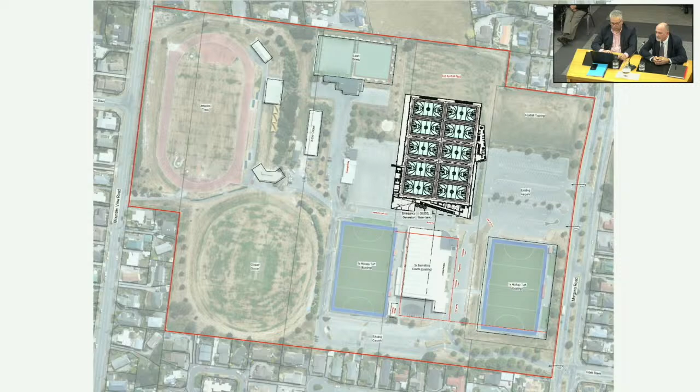This was the proposal put forward as a result of the initial tender, with two options for an 8-court and a 10-court stadium. This shows the 10-court as a separate building with integral changing facilities, reception, and gymnasium as support facilities, with the intention to demolish the existing stadium.

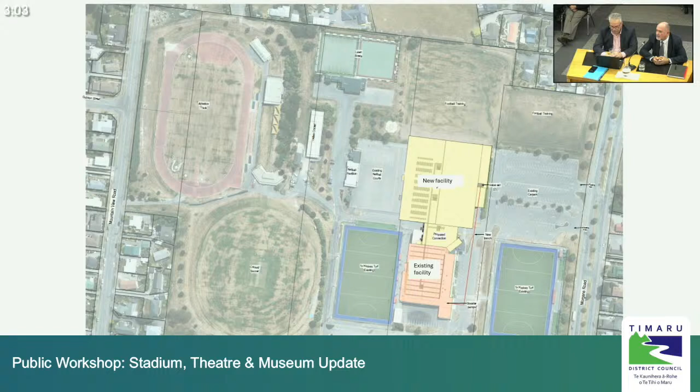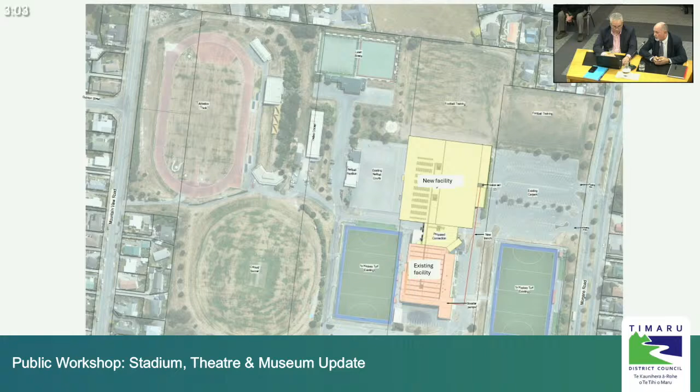Following the council resolution, we looked at the optimum way to retain the existing stadium, and we'll look at each building in more detail as we go through. You can see we've moved the new stadium south and linked it to the existing one with a building we originally called the Link Building. The yellow building is the new facility, an 8-court facility, and towards the bottom of the screen, the orange or buff is the existing facility, the existing 3-court facility.

The original tender that was put forward made some assumptions in terms of the ground conditions beneath the new stadium, to de-risk it and ensure that we were going into it eyes wide open. We undertook a fair bit more geotechnical investigation, and that did show that the ground conditions weren't quite as good as we anticipated or hoped. So that led to a bit of a redesign, a bit of a rethink in how we construct the foundations for the new stadium. It will involve a fair bit of earthworks, digging out, replacing with gravel raft foundations, beefing up the foundations to the new stadium, and some piling work around it. As you imagine, that all costs a bit of money, so we had that to contend with as well.

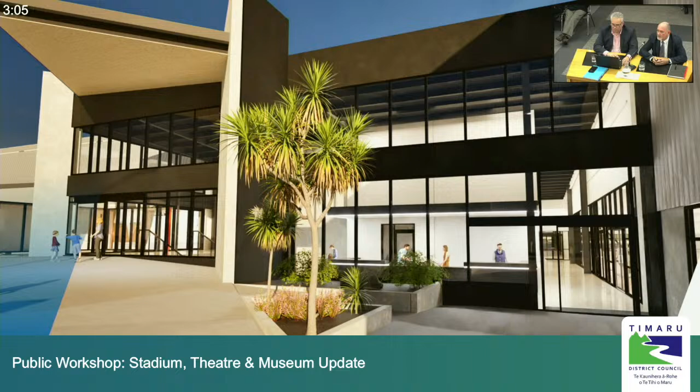The link building here, you see this is the new entrance, so anybody familiar with the existing stadium will be familiar with the beautiful 1970s entrance portico that we will do away with and replace it with a double height glazed atrium. You can see there how we're dealing with the level difference which actually occurs as a result of the additional earthworks required under the new stadium.

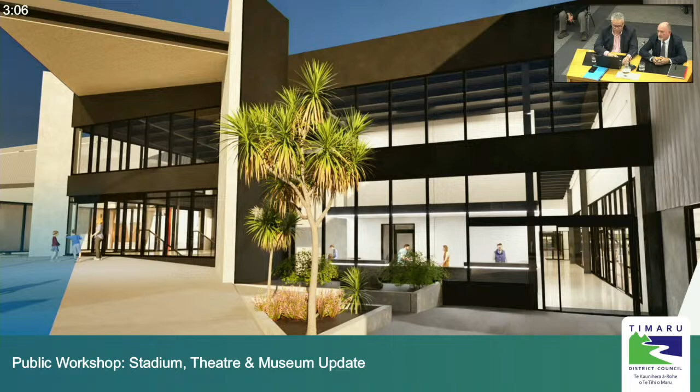We looked at returning the new stadium to the same level, and it was basically $500,000 worth of gravel for no benefit whatsoever. So the new stadium is effectively 1.2 meters below the floor level of the existing, but we show how we deal to that. That's easily dealt with outside through just ramps and shallow gradients.

Thompsons have been very careful to make sure that we're not going to get sun glare coming through, adversely affecting the courts. We've done a lot of research and a lot of liaison with other recent facilities as well to learn from their good and their bad. One thing we've learnt from them is to be really cautious about having too much glass that allows glare into the courts and ends up just putting blinds in, which negates the effect of putting the glazing there.

They're in reasonable condition. We'll give them a bit of a tickle, a paint and decorate, but they don't need any major works. At the top of the existing facility is the hockey rooms.

Now, the hockey rooms are a part of the building which is significantly below building code, but we've just ring-fenced that, and it's quite a simple solution. That's going to happen over the course of the next few weeks to strengthen the hockey rooms to get that up to 67% NBS.

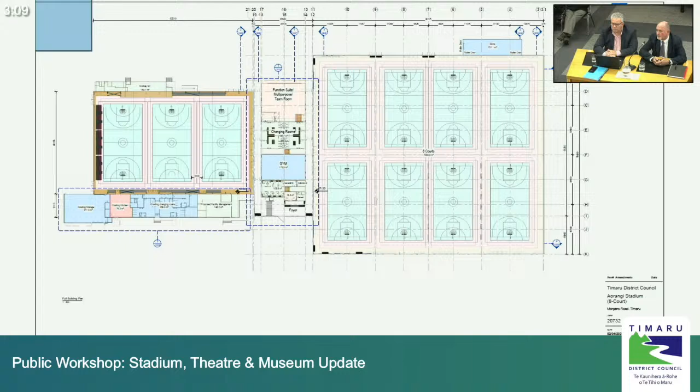Top right, you'll see the blue rectangle, that's storage. We've got a heap of storage already, bottom left, blue rectangle again, 220 square metres there. It's not really that well used in the existing stadium.

We'll supplement that with another 150 to 200 square metres serving the new stadium. Okay, the Link building - this shows the layout of the Link building. It's oriented 90 degrees different, just to fit it on the screen. The entrance is on the right side, so that's where we'll come into the lobby, and the black heavy lined rectangle you see there is the reception desk.

Behind there we've got a number of unisex changing facilities, individual changing facilities. We've got the back of house offices, the staff offices behind the reception desk. The blue rectangle there is the replacement gymnasium.

And then we move to the green rectangle, which is 4 large shared flexible changing facilities. They reach about 48 square metres, and having looked at lots of other facilities recently, they're getting up there in size. They're a good size for a changing facility, fully flexible, so they can be locked off and used individually, together, or paired as we see fit.

To the left is the multi-function room. So that replaces the function room upstairs, and it also acts as a multi-purpose room as well, which will serve as match officials' space for any events running in the new or old stadium, for any organisers running exhibitions in the old stadium, and for external events which might be held on the hockey turfs.

You'll see we've got a number of doors along the corridors which can be locked off and give access to external users without giving them free rein to the rest of the building. So we designed it to be really, really flexible.

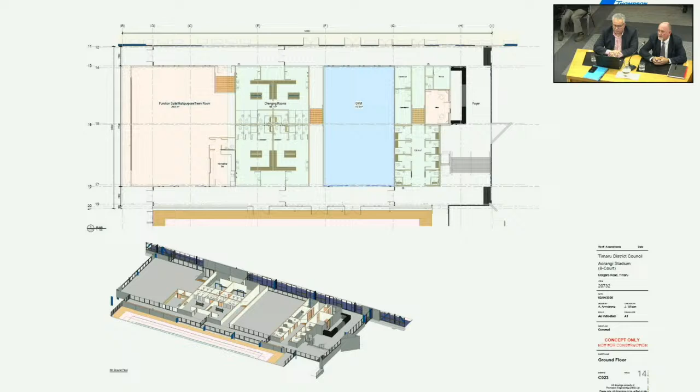We're still debating the car park outside as to whether to restrict vehicle access to that. And sorry, I should have said earlier on when we were looking at the site plans that there will be some improvements to the car park entries and accesses to traffic circulation.

We appreciate that we're cutting off that existing road that runs between the 2 stadiums, and that's a good thing because mixing traffic and sports and kids is never a good idea. So we'll undertake improvements around the rest of the campus as well to make sure that traffic circulation works and footpaths are increased in width, and also working with the parks team to put a new footpath connection from Mountain View Road across.

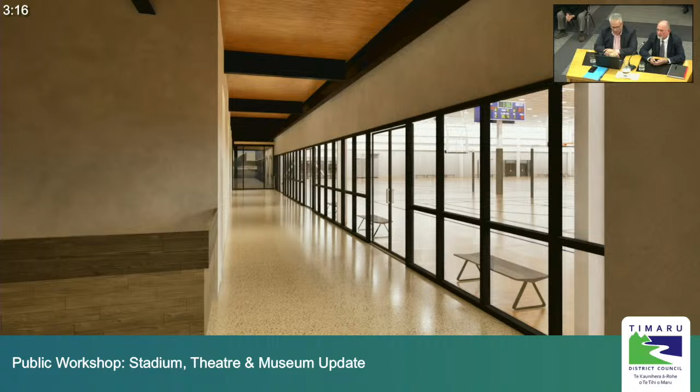Down both sides of the link, we've got good wide corridors. The Yorkshireman in me trying to save money wanted to delete one of the corridors, and it's actually not the right thing to do. Having looked at it and played with it with the designers, it's the right thing to keep wide corridors both sides with good natural light and glazed access into both of the sports arenas.

Another outdoor view looking in. That is the new gymnasium. That's not necessarily what the equipment will look like. That's just stock images, but that's the size. It is smaller than the existing gym, but it would be more efficient. There's lots of wasted space in the existing gymnasium.

And you can see there the gymnasium, being 1.2 metres above the hall, has a slight elevation. So you can see that going down that corridor, you've got a view into the stadium. And it was quite rightly pointed out to me that we need to have some shading to the bottom of those windows, because with anybody walking past people on exercise bikes, we need to give them a little bit of privacy.

That's the multi-function suite. So again, you're coming at level on the left-hand side and downstairs into the new stadium on the right side. And again, that little bit of elevation gives an elevated platform for officials who can set up and run their events and look out into the new stadium.

Elevation there, is that totally accessible? I'm sorry, is that room totally accessible? Yes, absolutely, it is.

Okay, and then we move outside again for some more aerial images to show how the facility is going to look. From the back, you can see there the link building, and that we dropped that down to a single story to optimise the space and minimise the costs and put the money where it needs to be, which is into the courts, the 8-court facility.

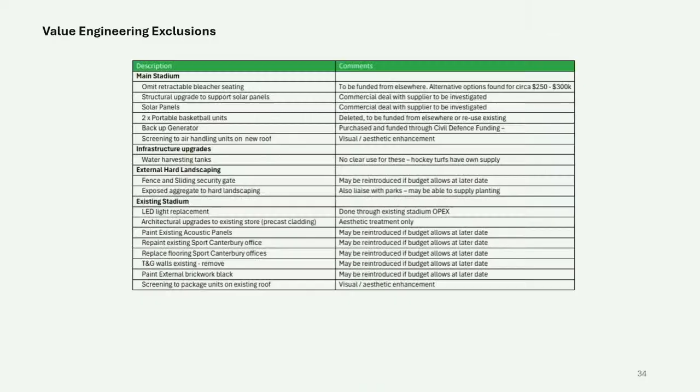There are a number of things that we took out under the heading value engineering. I hate the phrase value engineering because it's just shuffling deck chairs. But one thing we did take out was the retractable seats, simply because we want to work out what it is that we do need. We had a requirement for 1,000 seats in there, but nobody can quite work out, is that the right configuration? Is it the right number? So we can take a bit of time to work out what events we're going to hold, which seats we need in which facility, and there are a number of options that we can pursue, where we can get corporate sponsorship for those.

We'll see, but as I said, we've got the $1 million of contingency. I've got a chunk of that earmarked for the retractable seats. And some of the other stuff we took out is purely aesthetics, which, as we get through the project and de-risk it further, we'll slip back in as we don't spend our contingency money. But that's just a way to balance the contingency against the scope.

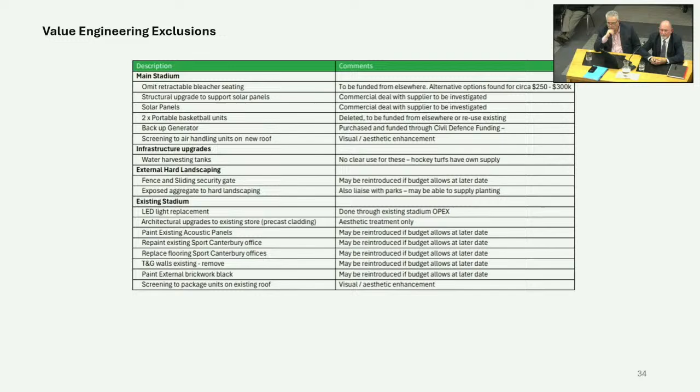I always give the analogy that if you're buying a house, you don't board out the attic before you put the carpets in the living room. So let's get the priorities right. But very happy with where it's all sitting.

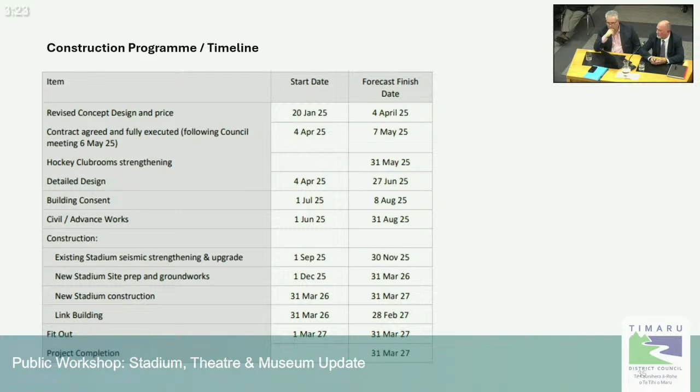In terms of our timeline, one thing worth noting is that we have changed the phasing for a number of reasons. So we're sitting now at line number 2, which is contract agreed and fully executed. The intent is to have that sitting on the desk waiting for signature on the 7th of May, following next Tuesday's meeting. So all being well, we get the big thumbs up, get Thompson's fully signed up, and away we go.

Should also mention that Thompson's are actually engaged under what we call a PCSA agreement, a pre-construction services agreement, and that's how we've been progressing the design to date. So we've been working with and paying Thompson's for their input to change the design. Hockey club rooms should be complete by the end of May, so we're working around their fixtures and their needs. That's not a huge piece of work.

Detailed design will run through from now until the end of June, followed by building consents. And the civil and advanced works will be done alongside that between June and August, so that those works are complete before Thompson's land on site on the 1st of September with the big diggers. So we are attacking the existing stadium first. We had thought about building the new stadium, keep the existing open, and keep facilities at all times, but it was extending the programme out.

And looking at earthworks in the time of year as well, we don't want to be digging major earthworks in the winter time. So we've liaised with Mike Wrigley at the stadium, and there's no immovable bookings between September and December. So the intent is to close the existing facility for 12 weeks between September and November, and to undertake all of the strengthening works that we need to do.

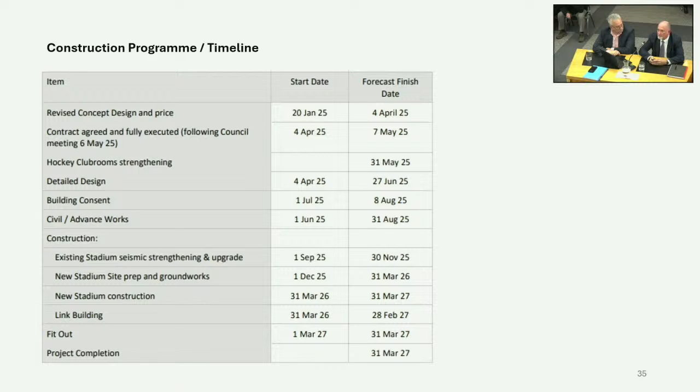So the recommendation that we will be putting to council for next week's meeting, we will be recommending that the council accepts the negotiated design and price as submitted and presented here, and that council approves the formal engagement of Thompson Engineering Limited under the design and build contract, which will be sitting on my desk waiting, and that council also agrees to the proposed change to the sequencing, and that is existing stadium this year between September and November, and then the rest of it completing by March 2027. Any questions?

Paul. Just one of the things with the user groups was concern around safety with the number of cars with the stadium. And so there is talk of putting bollards in for pedestrian only, isn't there, along that strip? So you would choose your car park, if that made sense. Do you want to just explain that a wee bit? Yeah, absolutely. So we went, I think if I flick back to the image.

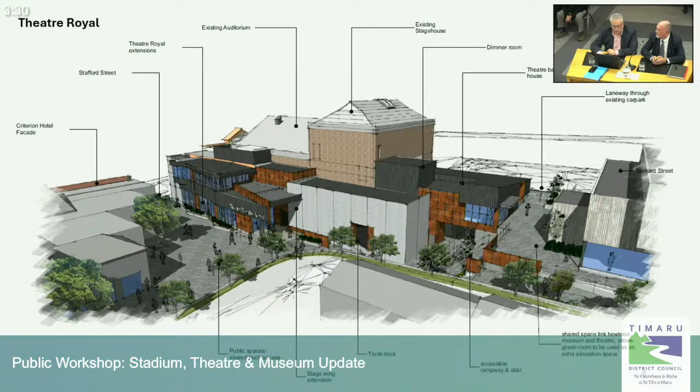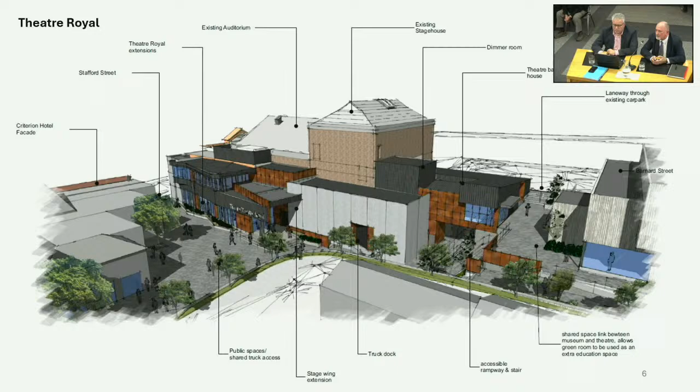So working with that resolution, we've been working hard with our architects to develop the concepts that you have all seen previously and to firm up some of the numbers. So this is an overview of the whole campus. I'll call it the campus because it's no longer a single building. And a key feature of the development now is the laneway. The laneway connects Barnard Street through to Stafford Street. It activates that whole northern facade of the theatre, and it also facilitates access to the museum, the museum being over on the right-hand side of the picture there. So that is a simple overview of the whole site.

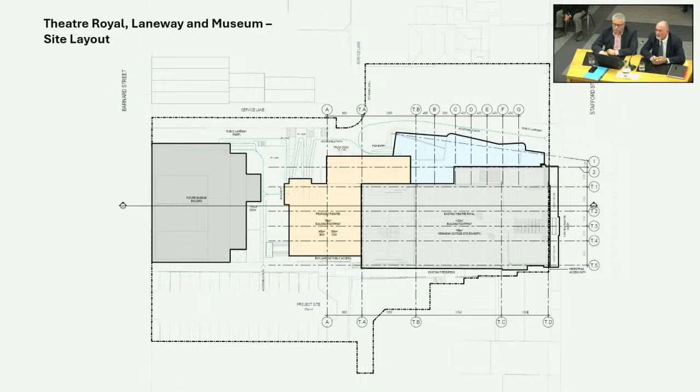So that gives a bit of a pictorial of how it's going to work. These things are moving targets, so the layout has evolved a little bit since then. But the red dotted lines there show the truck access in. This was a major issue, always has been for the theatre. The previous iteration had vehicles coming in from Barnard Street, and that was a long and difficult reversing manoeuvre from an elevated position, down a steep ramp.

So the new layout has traffic coming in from Stafford Street. It has vehicles driving in forward. I don't have a pointer to point onto the screen, but the vehicles come in, they drive off from Stafford Street and up to the top position that you see at the top of the screen there, and reverse up to the dock. And the dock is just at that top left corner of the dark pink.

So that gives the ability to offload and unload trucks through a brand new service dock, which is at the same level as the trucks, which they don't currently have. And then the vehicle can drive out forwards, so it's a lot safer as a manoeuvre. Appreciating it will be a shared space, so that will need to be very carefully stewarded when traffic movements are happening. But the reality is that deliveries and pickups will normally happen early hours and later hours. So that's how the trucks work.

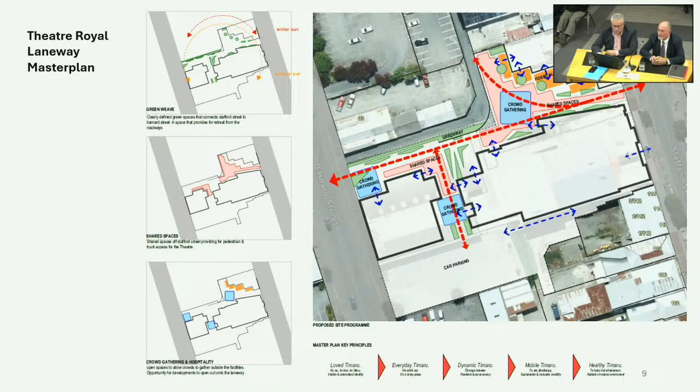It means that users can congregate and mill about and spill into the laneway. We fully anticipate that it will generate more hospitality outlets, as you can see up at the top of the picture there, and it just opens up that entire space and makes it a lot more user-friendly and usable. It provides a pedestrian access as well through from Barnard Street down to Stafford Street, even if you're not using the facilities.

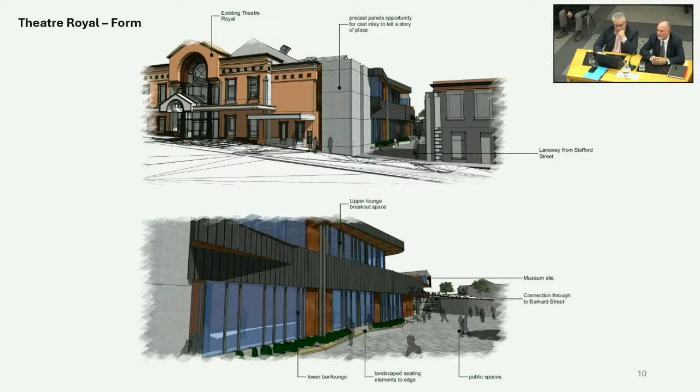So some more images here. Top image there is the front elevation of the theatre that you will all be familiar with, showing the entrance to the laneway and then the Criterion building, which we are retaining the facade of, and another view beneath that of the laneway itself. So the intent is that we're going to transform that into that. So that's what we've currently got on the left-hand side, and that's what it will look like once we've developed the entire campus.

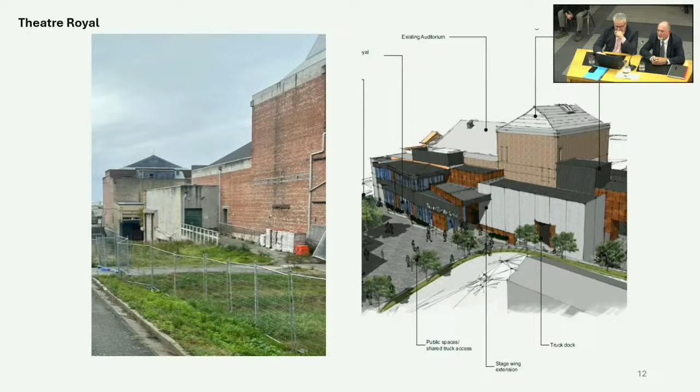And directly to the left of that is the light grey. That's our new stage dock. So any vehicles arriving, onloading, offloading will reverse up to that dock, offload into that light grey space, and then stage wear and scenery can be decanted into the stage wings and set up for the productions. To the left, then we've got our back of house, and I'll show you an image in a second that shows how we're using the topography of the site to best effect.

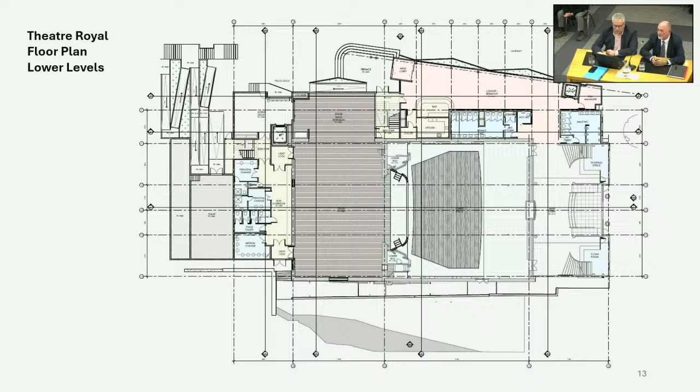So the current building goes to probably about where the back of those blue toilets are. So if anybody has used the facility in the past, you come into the lobby, it's quite a snug lobby, and you haven't got a great deal of circulation, and the congestion was quite bad with toilets. So this gives us the opportunity to open out the lounge areas, the hospitality areas, reconfigure the toilets to ease the queuing and congestion, and it opens up additional entries and accesses into the laneway so that there's more than one way in and out of the building, so not everybody's coming straight through the front door and standing making a nuisance of themselves inside the lobby.

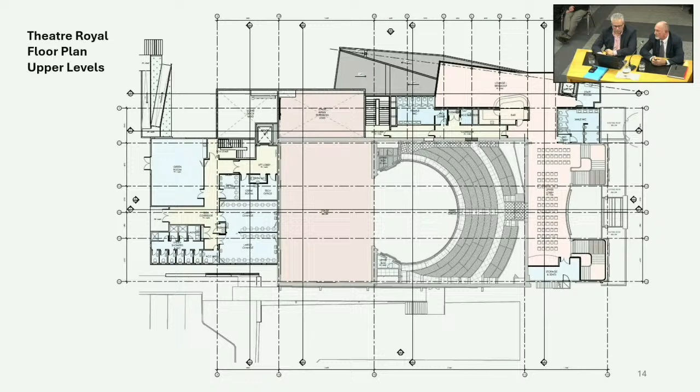As we come to the left-hand side, we'll go across the stage, which is a double height void. The blue and green areas, the big square to the left of the screen, are our principal changing areas, toilets and showers. The blue square to the top left is the green room, function room, event space. We're trying to make all the spaces multifunctional so they're lettable, usable spaces, not only for productions but for private hire, and to also service the museum, which is off to the left.

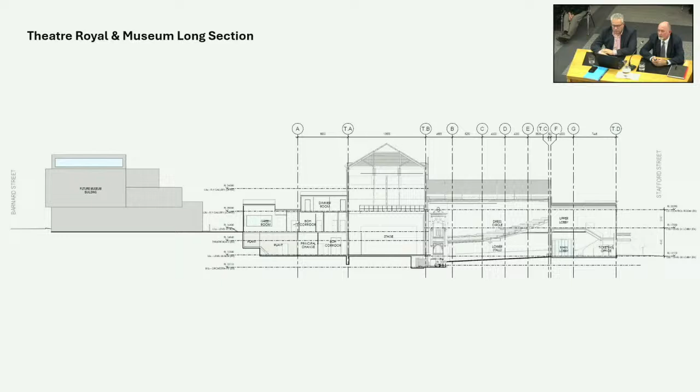The section through there shows the topography of the site. As you come through from the right, which is the entry into the theatre, you can see how the levels change. You come through the auditorium, you've got the stage, and then it steps up two levels. The back of house steps up two levels, and the upper level is designed to be level with the museum, so the green room feeding out can also be used and fed straight into the museum site.

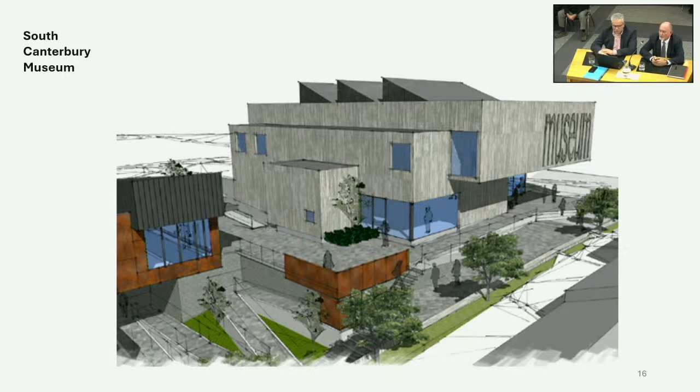There's the image there, the first images of the museum building, and the green room is the brown square just to the left. That gives a good indicator of how the public space is going to work and all the changes of levels. Really interesting, funky space to use.

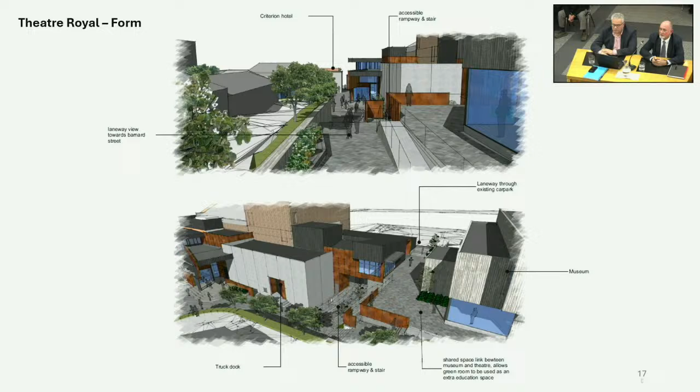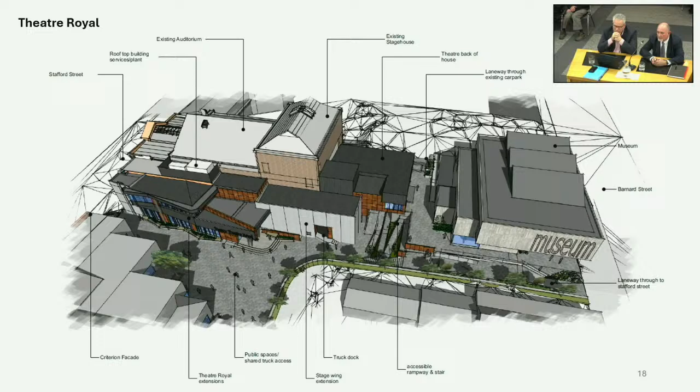Okay, so again a bit of an overview. If you look at the stage house and the auditorium, the big chunky bit sticking up in the centre, that's where we need to do most of our structural strengthening and seismic upgrades. This is from the previous iteration, and we're working to rationalise and simplify it, but we still need some fairly chunky steel in there.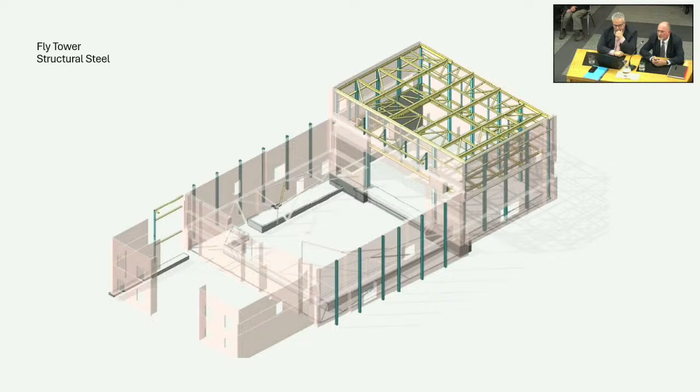That's for seismic upgrade, and it's also to accommodate the fly rig. I'll show you what a fly rig is in a second. So there's some fairly major structural steel work that needs to be put into that space.

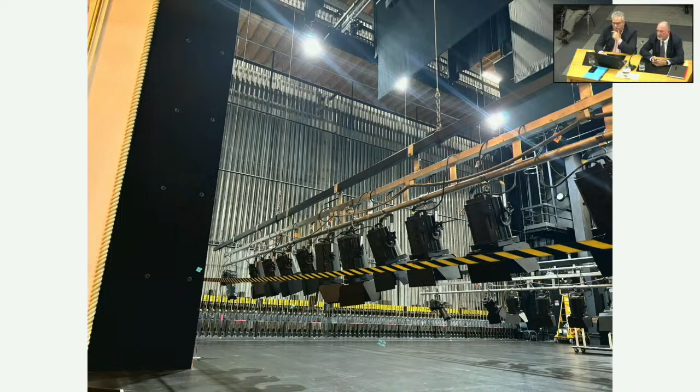Another image of it. When we talk about a fly rig, this is the Isaac Theatre Royal in Christchurch, just to give an idea of what goes into these spaces - that's what will be inside the stage tower, what we call the fly rig. It's all of the ropes and hoists that lift up the lighting rigs, the stage curtains, and the stage scenery sets. That's what we'll be putting into the stage tower, and one of the reasons we need to strengthen it.

The Isaac Theatre Royal again is larger scale than ours, but a similar building. That cost 40 million to refurb after the earthquakes, but it had significant earthquake damage, so it wasn't just preventative strengthening, it was majorly broken. Beautiful building, and that's what we're aspiring to get back to.

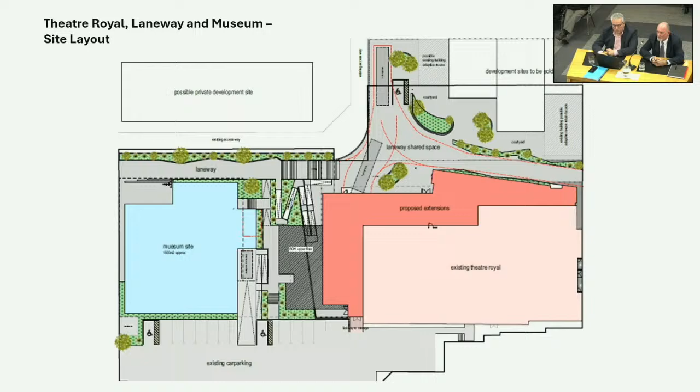Okay, so phasing of the works. Phase 1 is make safe and demolition of the back of house. Make safe's been done - there was a lot of mould manifesting inside the building, that's now been removed and treated. We've got fans in there, so it's a lovely safe space, we don't need to be wearing PPE to go in there anymore.

The demolition of the back of house, that's the three-storey brick - I'll call it the lean-to, probably a bit unfair to it, but it's the lean-to at the back of the building which is no longer fit for purpose, and that's got to come down to make way for the new back of house.

Up in the top right, the Criterion building, we will demolish in order to make way for the laneway, but we will retain the facade and a rectangle of building behind it with bracing to hold the facade up, which can then be sold to any future development opportunity. The existing Chinese Gardens restaurant - there's separate discussions ongoing as to the future of that, but we see all of that being a future development site activated by the laneway.

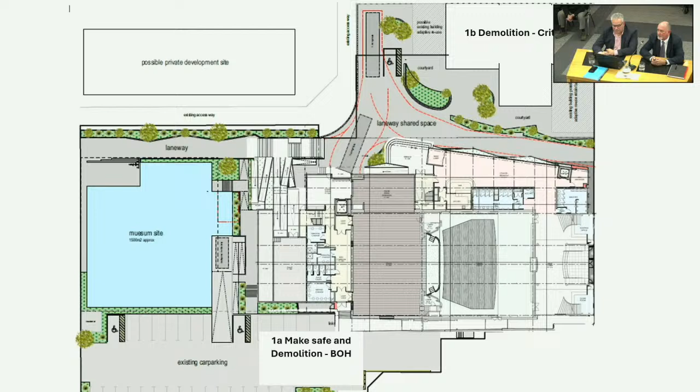Stage 2A, the laneway, I've divided into lower and upper, so 2A is the lower laneway. That's the minimum we would need to do to service the theatre, because that's got the truck access route in and also activates it as a pedestrian precinct.

2B would be the upper laneway, which is the pedestrian ramps that get you from the lower level to the upper, and preparing the building platform for the museum site. While I've split it into 2A and 2B, I really recommend we do it all together, because there's shared services coming from both directions. It would cost more to come back and do the upper as a separate piece of work later, so it makes perfect sense to just do the whole laneway as one piece.

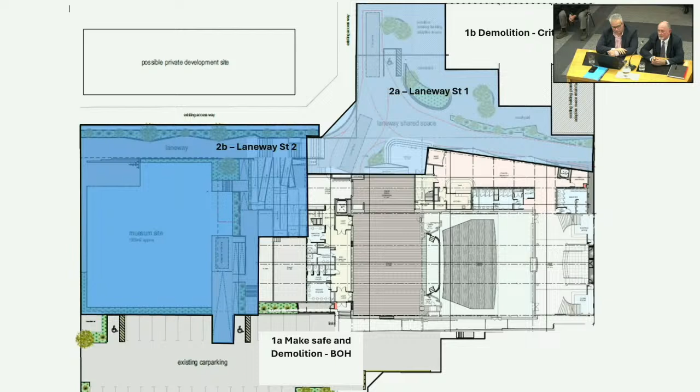The theatre refurbishment I've split into 3 major areas: the refurb of the theatre itself, reinstatement of the floors and the seats and the beautiful features in there, and the stage structures, new services throughout, HVAC services and the regular lighting, not the production lighting.

The structural upgrades, which we looked at briefly earlier, most of that will be in the stage tower and around the periphery of the building. And then the specialist fit-out equipment, so the specialist equipment will be your fly rigs, your production lighting, AV, projection, all the stuff that makes it a modern theatre.

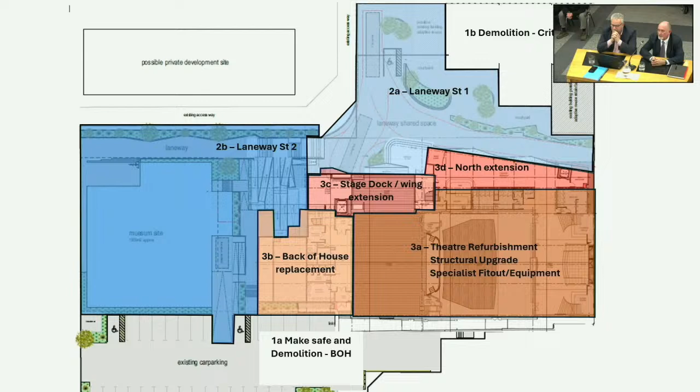3B is our back of house, lower floor and upper floor. 3C is the stage dock and wing extensions, and 3D is the hospitality extension and configuration, with stage 4 then being the museum. I've got these staging because that helps me with my programming as well.

So what's it all going to cost? That's the elemental costs of each of the elements. You can see the demolition is about 0.7 million. We will be going to local contractors and tendering that, so that's my worst case scenario, hoping we get a bit beneath that. But we have got asbestos in the Criterion building, which is pushing that up a bit.

And we've got to maintain the Criterion facade, which is not a cheap piece of work either. So the lower laneway is about 1.8, the upper laneway 2, because that's got the pedestrian ramps, the fancy bits. The theatre itself, the theatre refurb, is about 7.8, and these are all-inclusive figures, including construction fees, design fees and consents, etc. So it's all inclusive. The structural upgrade will be about 2.7 million and the specialist equipment about 1.8.

And all of these are down from the previous iterations. There are ways to simplify and to provide a set of facilities and equipment which are commensurate with the needs of the theatre and the operational plan. Back of house is significantly cheaper than the previous.

It's small, it's about 450 square metres. The previous was 660, I believe, at about 3.7 million. And the stage dock, wings and extensions will be 2 million, with the hospitality extensions and reconfigurations about 2.9, and that's reconfiguring the existing toilets within the existing space as well as the extension.

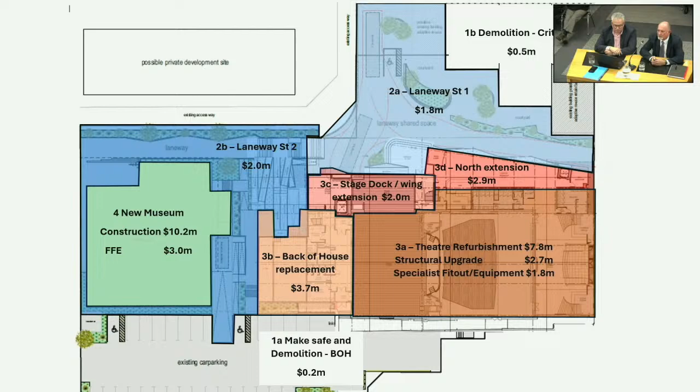Okay, it may be a bit difficult to read those on that screen, but that's the engineer in me coming out. I work in lists and numbers.

We can see there, in the same colour coding, that for the entire project, against the budget of 47.2 million, my estimate currently sits at 38.6, which gives us 8.6 of contingency, 18% of contingency fund in the back pocket. If we split that into the theatre and museum costs, then the theatre is sitting about 23.4, which includes the 1.8 for the lower laneway, against the approved 29.2.

That keeps me 20% contingency, 5.8 below the line. Museum, as I said, a bit more of a blank canvas, but we've allowed 15.2 for the construction, the FF&E, and the upper laneway, against a budget of 18, which gives me a comfortable 15% contingency, which at this stage of design is fine.

So I'm happy that we've got the numbers, we've got the design to a point that really works within the budgets and conforms to the requirements of the resolutions, which is really cool.

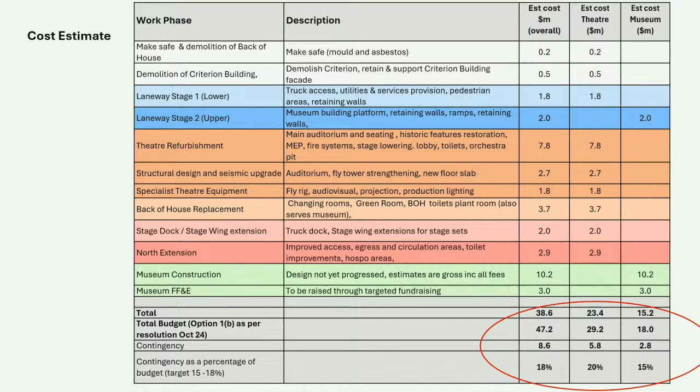Some questions, sorry. So these figures are new in our steering group meeting? It's a reconfiguration of the figures you've seen, because they're now inclusive of fees and things, whereas before they were separated out. So it's presented differently, but the numbers are pretty close to what we have.

So cost estimate, we're on that one. So you're saying the theatre costs have come out at 23.4 million? Yep. Including the lower level, the lower laneway, which is what's needed to facilitate the theatre. Okay, whereas previously it was including the whole laneway. Okay, including the lower laneway, okay.

And then the 15.2 for the museum includes the upper laneway? Yep, is that correct? Yep. Okay, so since the last time I looked at these figures, that's a $7 million saving. Yep.

So my question is, the CEO has delegated authority to 24 million. So I look forward to the resolution. It doesn't need one, does it? He's got, he can get cracking. So yeah, game over. Good, excellent. That's my interpretation, Councillor. But there is no contingency in there.

The north extension, yeah, so that's the last stage. So can that be done in isolation, and when we get towards the end of the project, choose not to do that? Or does it require that to strengthen the rest of the building? No, it doesn't require it to strengthen the rest of the building. So the phasing is partly my phasing from my programming. When we get a contractor on board, they may elect to do something a bit different, but I don't think so. You've got to start from the bottom and work up.

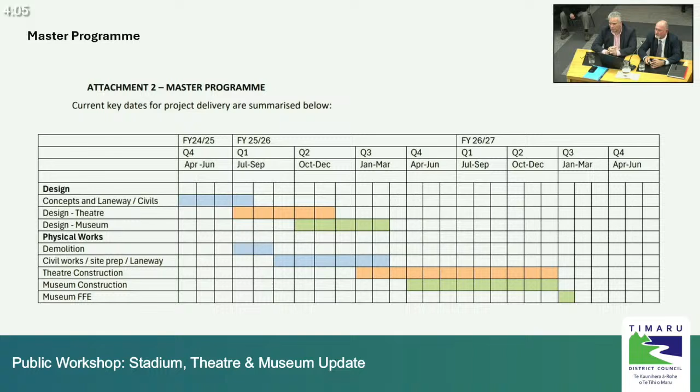But to answer the question, I do recommend that the two are built together, because it will cost more, be more disruptive, and it won't be as good a product as if we do the whole thing as one in one hit. The museum build looks completely different to what the theatre is. So you will have two different contractors on site? Not necessarily.

So I mean, the museum, if you look at the structure, it's a steel and concrete structure, which most contractors do. Steel and concrete, yeah. But any major main contractor will be using the same palette of subcontractors and painters and decorators and plasterers and sparkies and fit out. So whether it's a brand new modern tilt slab concrete building or a refurb of an old historic one, when you then get down to the nuts and bolts and the pipes and the wires and the heating, it's the same trades.

There will be specialists needed in the museum for the fit out, for the exhibition fit out, absolutely. But that's exactly the same as needing a specialist theatre set of contractors for putting the specialist gear into the theatre once we've done the pipes and the wires and the bones of it. So they might look completely different, but it's all construction, and it's not massively different.

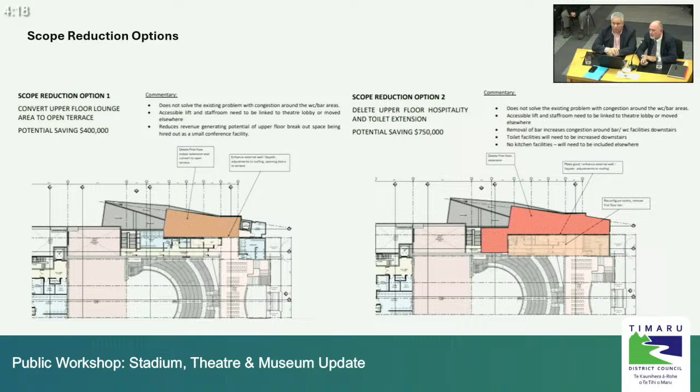So what we've got here, the three options if we need to go there. Option on the left is to convert the upper level to an open terrace rather than an extension. And my first estimate is that's a potential saving of 400,000-ish. The option on the right is not to have the upper and just to have it as a single story, and that would save about $750,000, I reckon. And these are quite rough figures just in anticipation of that question.

And if we were not to extend at all and just refurb the theatre as it is, it's probably 1.8 million, but as I say, you end up with a big, ugly, blank wall facing out onto the laneway and no activation, which is the whole driver for doing it.

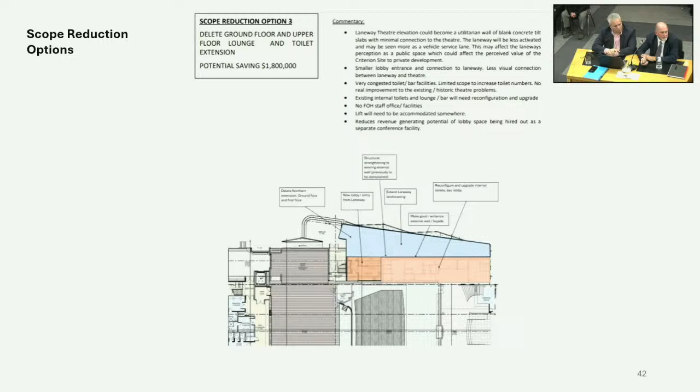My last thing before it goes out to the public, can we withdraw the figures that show we'll get 750k if we sell the Royal Garden and the Criterion, and the same for the museum? Because whoever put those figures in is nuts. Yeah, they were legacy figures from some previous papers, but I don't disagree. Yeah, well, can we remove them? Because you're not going to get 750,000 for either of those sites. Professional term in the real estate. Councillor Scott, go for it.

Not to go back to the stadium, but I've just received a couple of very stressful texts saying that the basketball have a large event on in September and no one has consulted with them. They are running their year 3 and 4 basketball during that time, so it'd be great if someone could get on the phone and have a chat with them, instead of me sitting here getting a text saying they've not been consulted with. I'll talk to Mike, but they have been consulted. Maybe it's just a different person. But yeah, well, fine. We'll follow that up. Manager. Yeah. So if we need to delay by 2 or 3 weeks to start it, to accommodate that, that's fine. But I know that basketball were spoken to about that.

So we actually said end of September. I think it was the weekend after South Canterbury weekend, and the only major booking after that is the car show. Yeah. Listening. Yeah, no, it's cool. We said beginning of September to whatever, and so they're obviously watching the live stream. When we looked at the diary, we went the week after South Canterbury weekend. 14th, isn't it? I think it's the 21st, something like that. So we can work around that. Yeah, we can work around that. Alrighty, we can take that up offline.